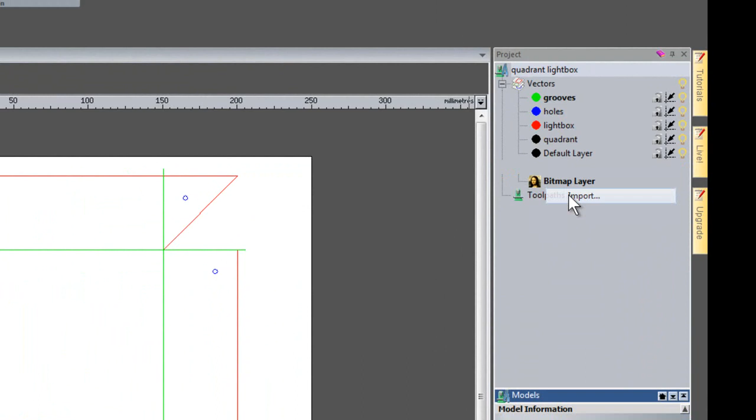So what I'm going to do first of all is to import an image into the bitmap layer. So I'll right click and select import, and I'm going to select here, which is the Quadrant logo, and I'll open that, and it will open up quite large. I'm going to do bitmap to vector.

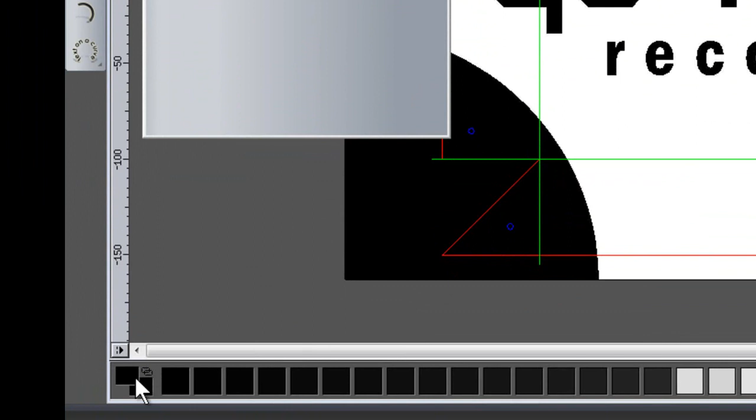Make sure my default layer is selected, and I'm going to reduce the colours. I can also reduce the colours here. We have an icon there, or I could right click here and it will allow me to reduce the colours. I'll just move this down to 2 colours, so it's black and white. I'll change the speckle size to 5, and I'll create the vectors. I'll just turn off the visibility of the bitmap layers.

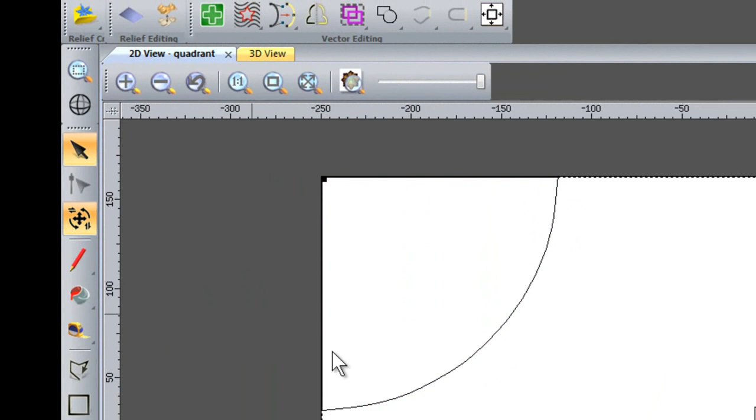There we have the Quadrant Recordings logo. Just going to make this visible just for the time being, just so I can see it. Select all of the vectors, and I'm going to transform these vectors, and I'm just going to change the width and the height of these. I'll unlink this so it's not in proportion, and I'm going to change them to a specific size, which is 250 by 150, and then apply that, and just close this. I'll turn the other layers back on now.

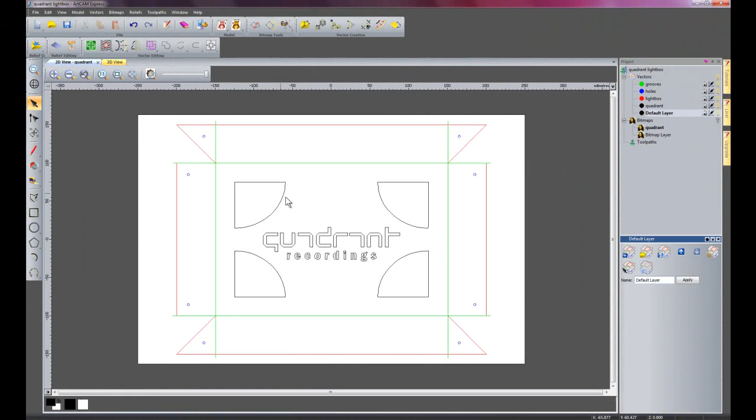Just select the light bulb. As you can see, at the moment we're going to be cutting this out from the back because we have the fold lines here, so that's going to be the back. At the moment, this Quadrant Recordings, if we were to cut that out like so, it would actually be the wrong way around when we turn the light box over. So what we need to do is to mirror this Quadrant Recordings logo. So I won't copy the original vectors, and I'll just do it horizontal center, so that's just mirrored that through the center. So there we have the Quadrant Recordings light box ready to machine now.

So I'm going to select toolpaths, and I'm going to do a 2D profile toolpath. I'm not going to select any vectors with this. As I said before, because I've got the vector pack installed, I can use the vector layers to choose what I want to cut. So instead of selecting vectors, I'm going to come down to grooves, and the finished depth is going to be 2mm, and the material thickness is 3mm, so this just creates a groove so it can be folded, as this is going to be made from Dibond.

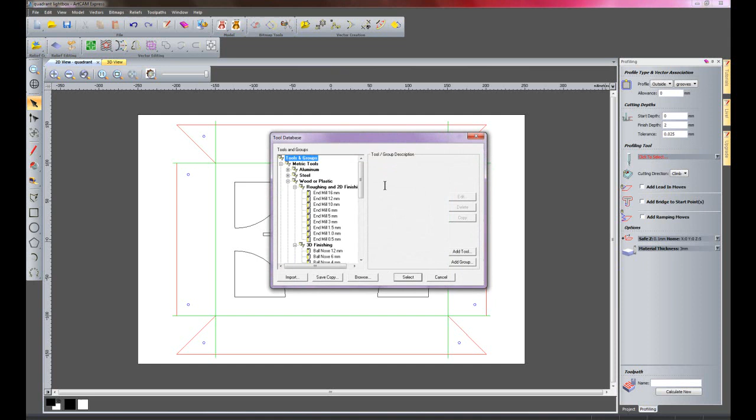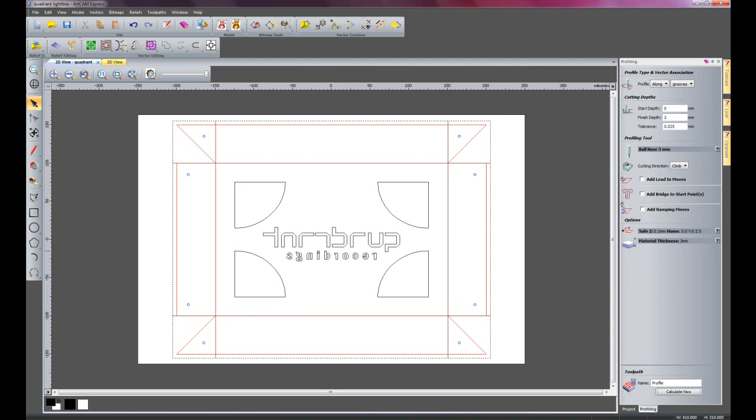So I'll select the profiling tool, and I'm going to select a 3mm ball nose. I'm going to use aluminium. Go to ball nose, select that, and I need to also make sure that I am selecting along as the profile because I want to go along these grooves. So I'll click calculate now, and there you can see it's created a toolpath along these grooves. So I'll just close that now, open up my toolpath tree, and now I'm going to create an inlay toolpath.

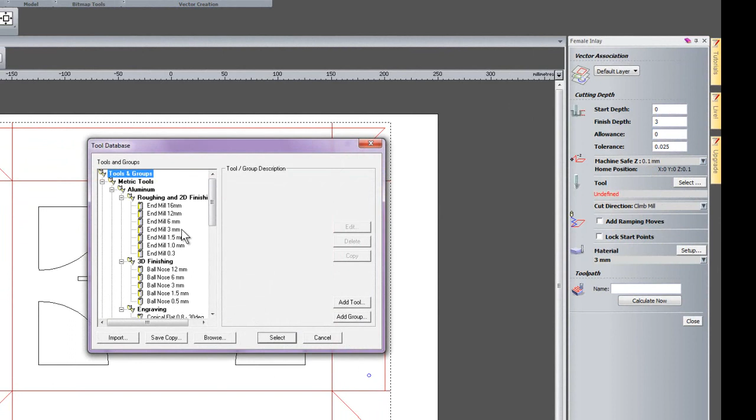So I'm going to select inlay. I'm going to create a female inlay. So I'll select that there. Instead of selecting vectors, I'm going to use the default layer, which is where my Quadrant Recordings logo is. And the finished depth, this is going to be 3mm, so it cuts pieces out. The tool, I'll select a 1mm end mill for this. This is because I don't want to have any large rads in the corners, and I'll select that.

I'm not going to include any allowance on this. I'm going to do this in the next part when I create the insert. So this is just going to be cut out to size. So I'll just click calculate now, and there you can see it's created the toolpaths for that.

With the lettering cut out, on the G, on the D, O and the E, they all have small inside islands. What will happen here is that these will be cut out and they will probably fly out of the machine unless they are held down properly.

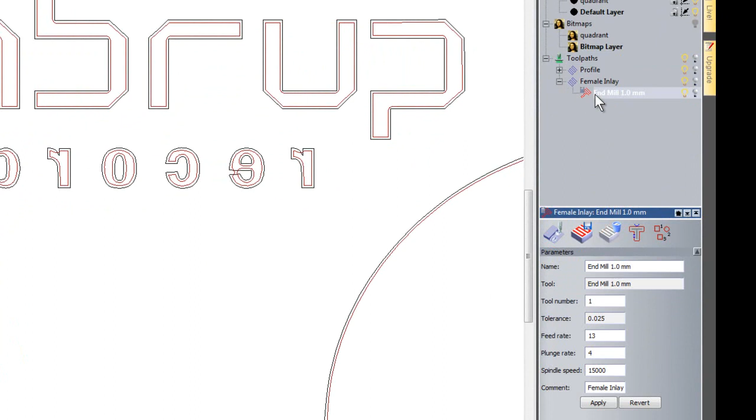This is one good reason to have the advanced profiling module upgrade, because if I click the female inlay, the 1mm end mill, I can select here, which is profile options, and you can create bridges with this. I'll create a bridge length of 3 and a bridge thickness of 0.5. What this does, it creates a tab between each part, and this will allow it to stay within the material, and then you can just break it out afterwards and just trim up the edge.

This will save you having to create separate parts for these particular pieces. So I'll just click one bridge and select create bridges. If I just zoom in here on the R, as you can see, here's a bridge, and what I can do is just click on it and just drag that round. I'll just drag this round to here. I can also just drag these round.

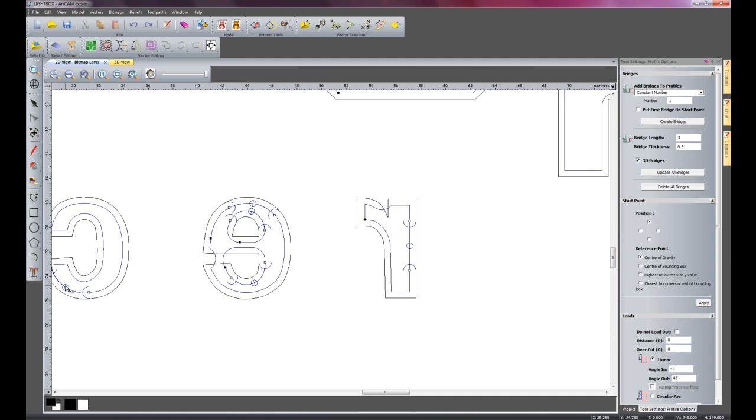What I'm going to do is just drag that round so it creates a bridge between the loose piece of the E, and I'll just move this round here. I'll move the C round to this edge here. It's best to have these bridges on straight faces. This is just so you can clean it up easier afterwards, as you can't get in there to file off the pieces afterwards. It's best to do it on a straight edge.

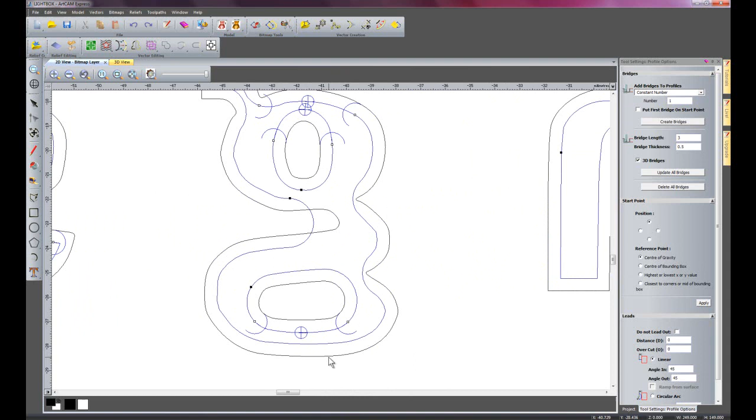So I'll just move these round, and as you can see here on the G, I have a bridge there, but because I've just selected one on each entity, I need two just to keep the two bits in the material. So I'll just double click here, and that will create a new bridge there. So I'll just leave that like so, and I'll just close that, and that's created bridges for me just to keep the parts of this logo in the material. So I'll just minimize that.

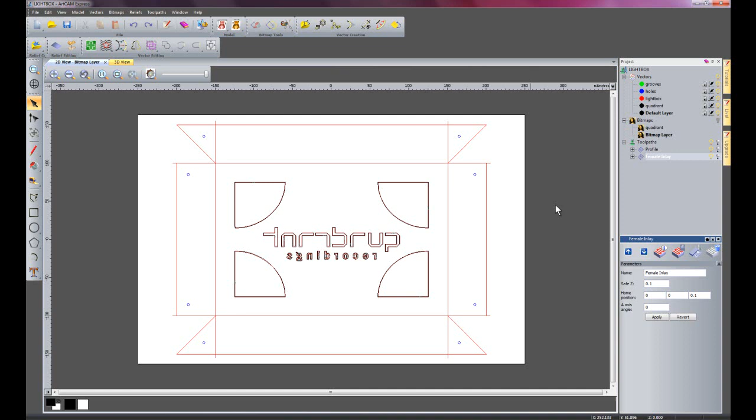Now I'm going to drill the holes out for the rivets. So I'll click toolpaths and select create drilling toolpath, and I'll just move this over to here. Instead of selected vectors, I'm going to go onto the holes layer, and the finish depth is right the way through the material, so it's 3mm. Select the tool, it's going to be a 3mm end mill, as these are 3mm diameter, and I'll click calculate now. That's created a toolpath to drill the holes.

Finally, I'm going to do a 2D profile on the outside just to cut the piece out. So I'll select profile and selected vectors. I want to use the light box, so it uses that layer to cut out. Finish depth of 3mm. The profiling tool, I'm just going to use the same 3mm end mill. I'm going to change the step down on this to 3mm, so it just cuts it straight the way out. Calculate now.

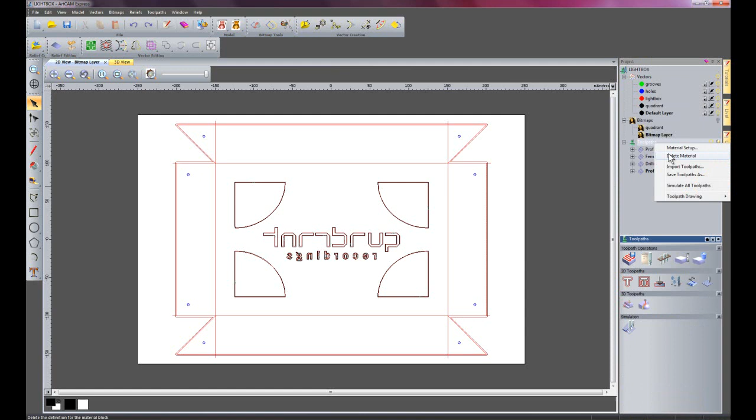So I'll just right click here, simulate all toolpaths, and there you can see that's our light box ready to be cut out and then folded up. So now I'm going to show you how to create the inlay for the light box. So I'm going to go to File and Open, and I'm just going to open the image straight from the menu. I'm not going to save the changes, and this will open up the image straight into my bitmap layer.

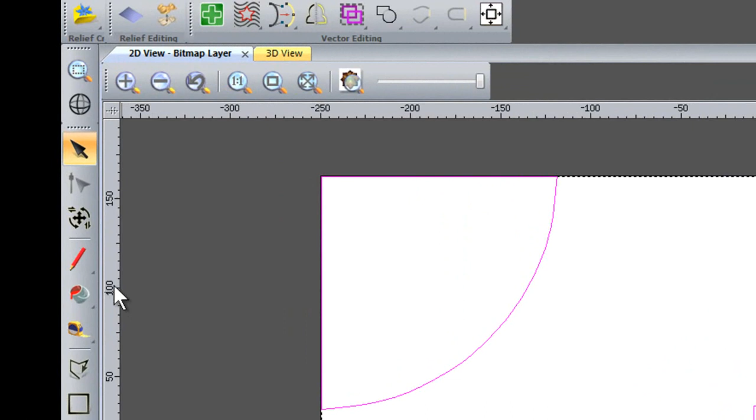Set the origin as the center, and I'm going to change the width of this to 500mm, as it's a little bit high at the moment, and then just OK that. Go straight onto my bitmap to vectors tool, reduce the colours down to 2, and then OK that. The speckle size needs to be the same as the previous one, just so there's no inconsistencies, and then create the vector, and then close that. Turn off my bitmap, and I'm going to transform these vectors.

So I need to unlink the width and the height, and it's going to be 250mm by 150mm, and then apply that. So that's the right size now. Just zoom in a little bit here, and now I'm going to offset the vectors.

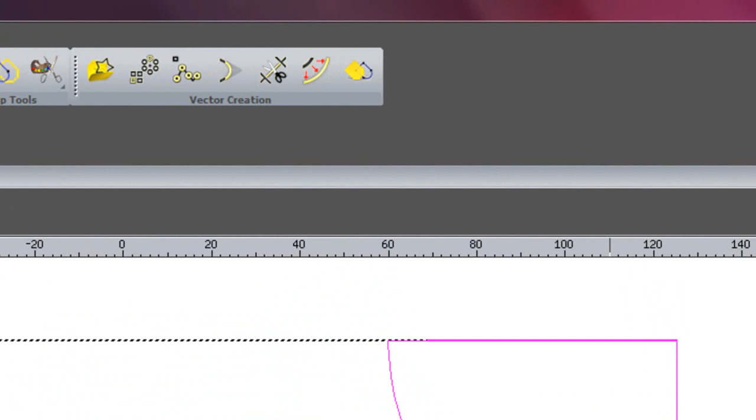This is just to allow some clearance, just so the insert fits into the inlay within the light box. So I'm going to go inwards by 0.1mm, and I want to delete the original vectors. So that's offset inwards by 0.1, so I have 0.1 clearance around all of the vectors.

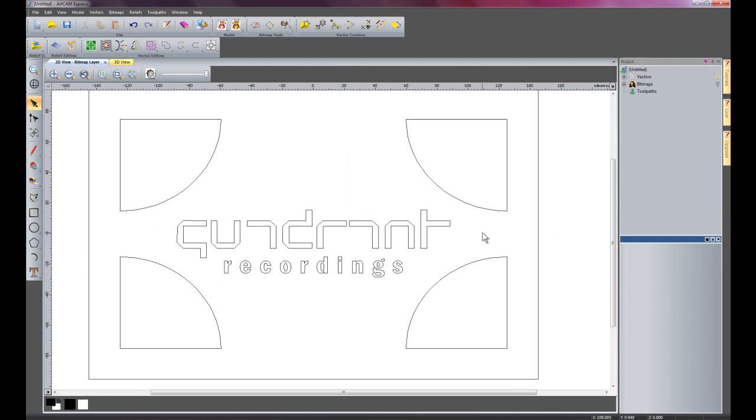So now I'm going to create a rectangle around this, and the width of this is going to be 290 by 190. This is just so it fits within the light box, and I'll accept that. Press F9 just to center it, and then just zoom out a little bit. Now I'm going to do some machining on this part. That's all that needs to be done as regards to the vectors.

So I'll click toolpaths, and this time I'm going to create an area clearance toolpath. I'll just move this over to here so it tabs with that. And I'm going to do it under selected vectors. Press Ctrl A just to select all the vectors. The finish depth, this is going to be 3mm deep, and the material is actually going to be 5mm thick.

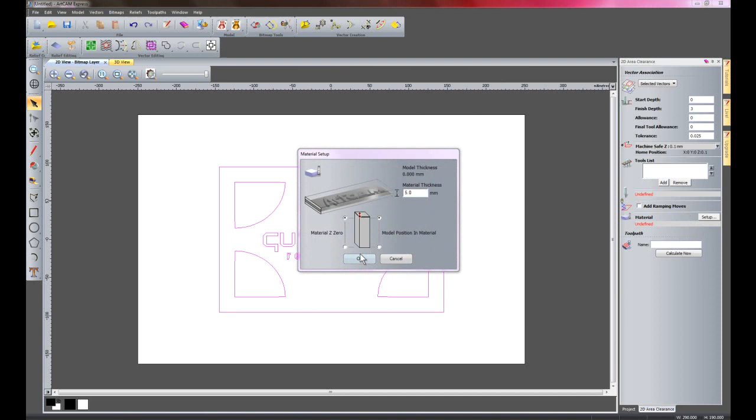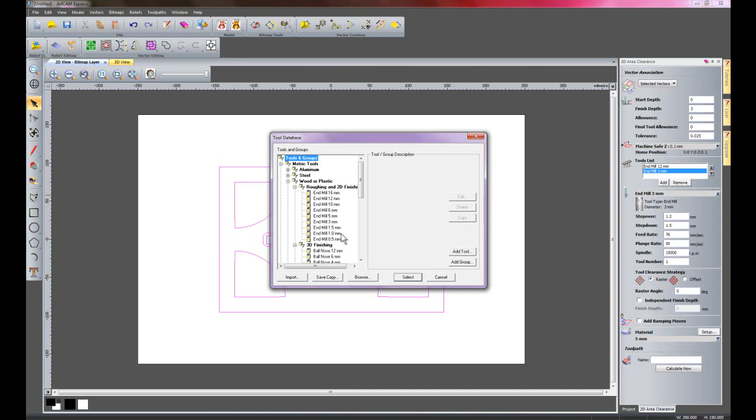And I'll set the model position on top and the Z0 on top, and I'm going to add some tools now. I'll close my aluminium tools because this is going to be made from plastic, and I'll open that drop down. I'm going to use a 12mm mill with a step down of 3mm, and I'm going to use a 3mm mill with a step down of 1.5, and I'm going to use a 1mm mill, which needs to be the same as the inlay that I created previously, and that's also going to be 1.5 step down.

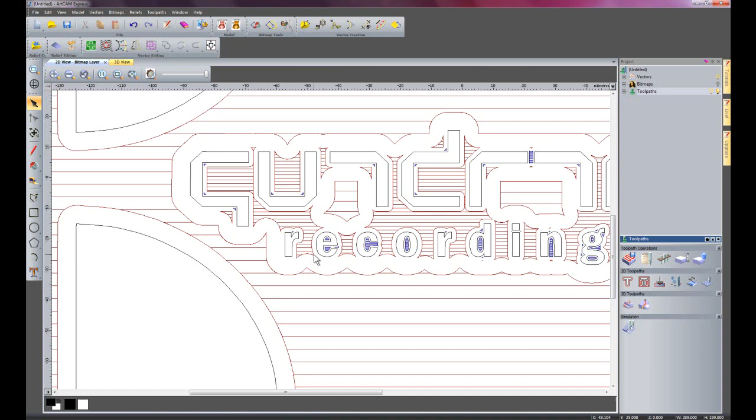Click calculate now. That's given me an area clearance. If I just zoom in on the toolpath, here you can see that's the 12mm cut there, then it's doing a leftover cut for the 3mm, and then it's just getting in the tiny gaps that the 3mm couldn't get in using the 1mm cutter. So this is just to blast away a lot of material.

Finally, I'm just going to do a profile along the outside, and I'm going to use the same 12mm mill for this, and selected vectors, finish depth of 5mm, which is the material thickness. So I'll select my 12mm mill, and this should cut right away through, and there we have that there. So that's the toolpaths complete for the insert.

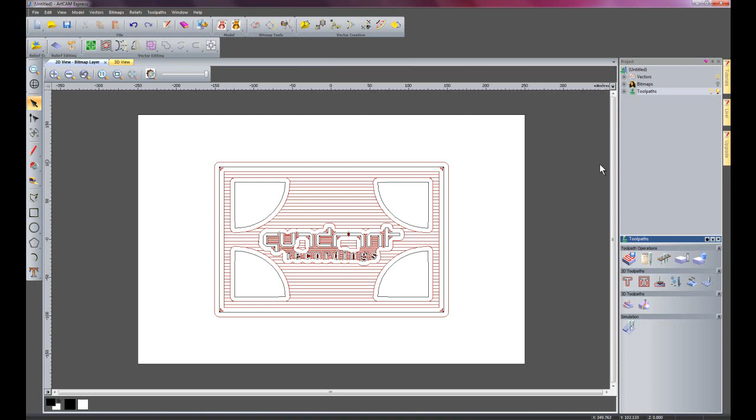So I'll just right click here and simulate all toolpaths, and if I just zoom in here, that's the roughing, that's the 3mm, then the 1mm, and then the cut on the outside. So there we have the insert ready to fit into our Quadrant Recordings Lightbox.

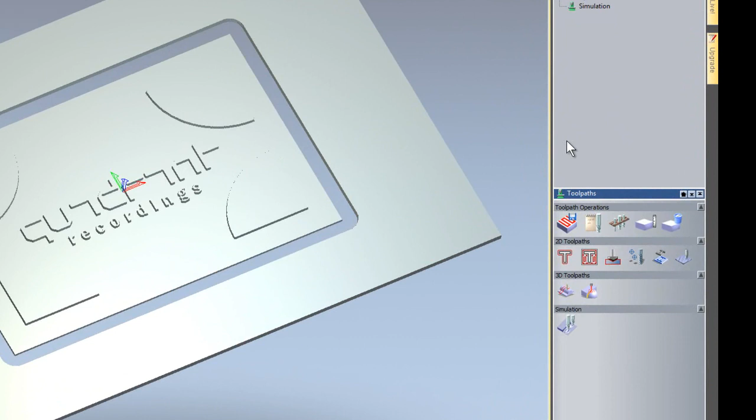Finally, I'm just going to show you how to actually save these toolpaths so you can send these to your machine. So if I click here, Save Toolpaths, and here you can see, I'll just move this one back over here. That was the final toolpath. Here we have all the toolpaths that I've created, and I can just select one or all of them and just move them over into here, and then just select the machine that I have. Let's say I have Axis metric machine, and then just click save.

Just save them to the desktop. Just save it as one. Can close that. And if I just switch to the desktop and look here, then you can see my NC code for that particular toolpath.

I can just do the same thing if I have a tool changer, so I could just select, say, a few of the toolpaths. I need to make sure that I change the tool number and it coincides with my machine, and then just change multi-tool and then just save it in exactly the same way.